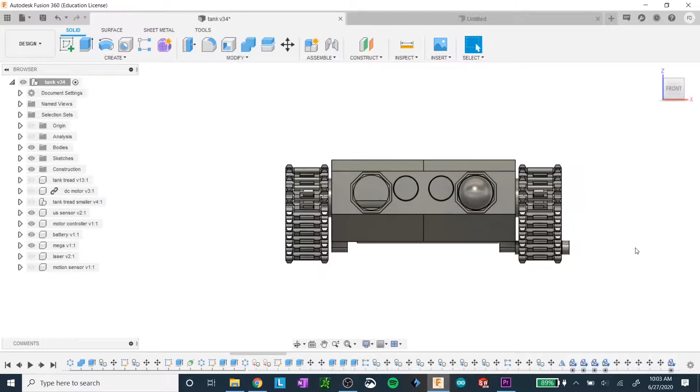So today we're making a tank. As you can see, the design isn't really that complex. It's just the treads, some sensors, some motors, the battery, and the controllers.

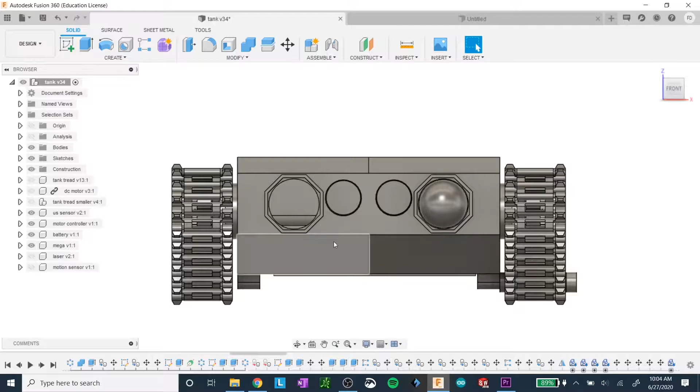This design took me about a day and some change. As you can see, we got the ultrasonic sensor right here for depth perception. We have a motion sensor on the left and right, so it can see if something's moving on its left or right. We have the treads, two 12-volt motors in the back, the motor controller, the battery, and the Arduino.

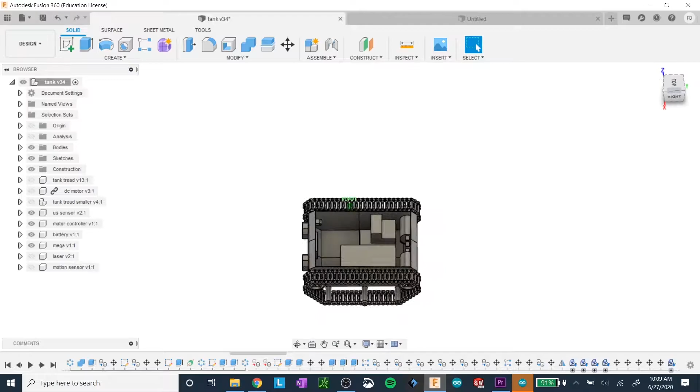So right now, I'm gonna skip to a quick build montage so you can see how I put this together, how I printed the parts, and how everything went.

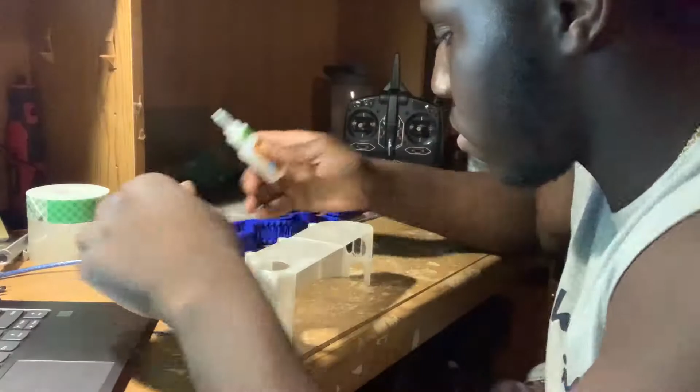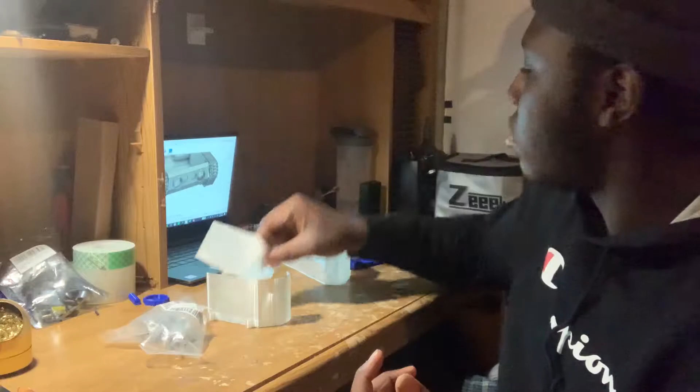Okay, so now I got all the parts printed out. Got the treads, got the body. Second half of the body, I'm still gluing together. My motors came in this morning, so I'm gonna fix those and solder them.

You'll notice they fit perfectly into the spot I made for them. It just fits right there. See it? So it fits perfectly. I'm probably gonna glue them or tape them in there.

So probably next time you see this, we'll be all together and ready to go.

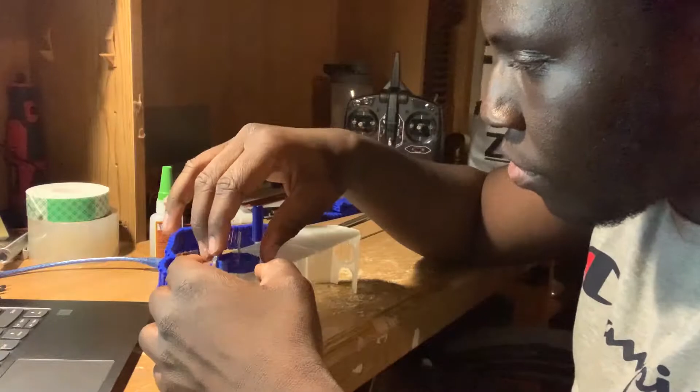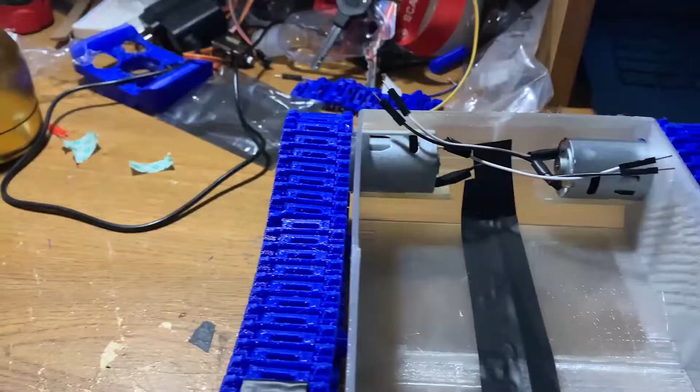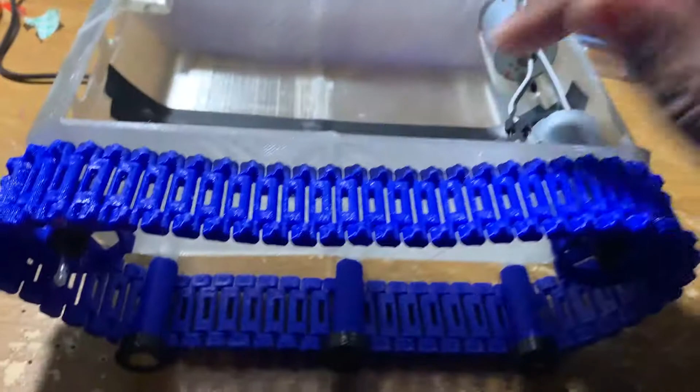Okay, so right now I got the tank all put together, motors in the back, treads on the side. Everything put together. I'm gonna put the batteries and everything just to see how much weight it actually has and see if it really moves now.

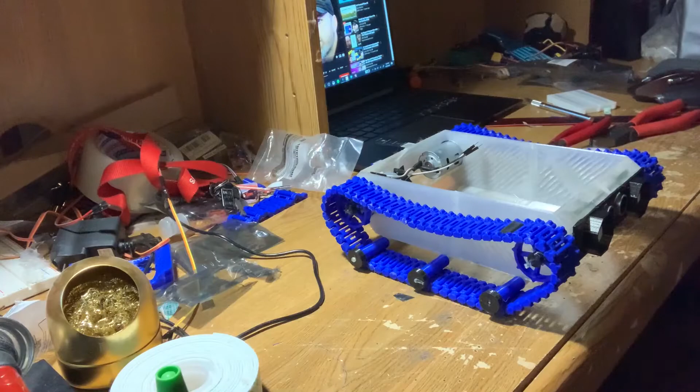Okay, so as you can see, this right here is the design I'm going for. I got the battery right here, I got the Arduino here, I got the breadboard, the motor controllers, I got the motors, the receiver, I got all the electronics here for the depth sensors and the motion sensors, the treads on the side. And yeah, that's basically what it looks like right now.

I'm gonna try and get the code working today or tomorrow, so you should see that video soon.